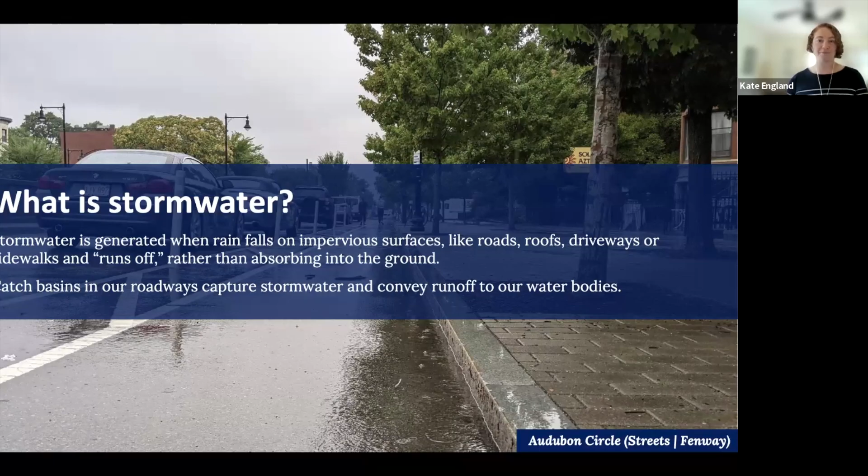Next slide, please. So in Massachusetts, and I think also largely worldwide, we have 2 major kind of issues with stormwater. The first is a water quality issue, and the second is a water quantity issue. So as stormwater moves across hard surfaces, it picks up a number of pollutants that are currently sitting on those surfaces, things like bacteria and nutrients, litter, and other things, and carries all of that with the water to our water bodies.

The second issue, the water quantity issue, is that the majority of our storm drain systems are designed to handle a certain amount of water that falls over a certain amount of time. So during a typical storm, less than an inch of rain falling over a longer period of time, our storm drain systems are able to capture and manage that water. But during larger storm events, which are becoming more frequent and more intense in Massachusetts, we are seeing an inch or 2 inches of rain fall in an hour. So the city of Boston storm drain system is designed to capture 5 inches of rain over the course of 24 hours. So when about an inch of rain or 2 inches of rain falls in an hour, our system just can't keep up. Next slide, please.

So thankfully, we have green infrastructure or nature-based solutions. And the way that we are defining those for city of Boston and for Massachusetts are features that use plants and soil and other natural materials to mimic our natural water cycle. They capture stormwater and allow it to absorb back into the ground the way that it would in a more natural, less developed environment. And while that water is absorbing into the ground, soil and plants are acting as filters to remove pollutants from that water.

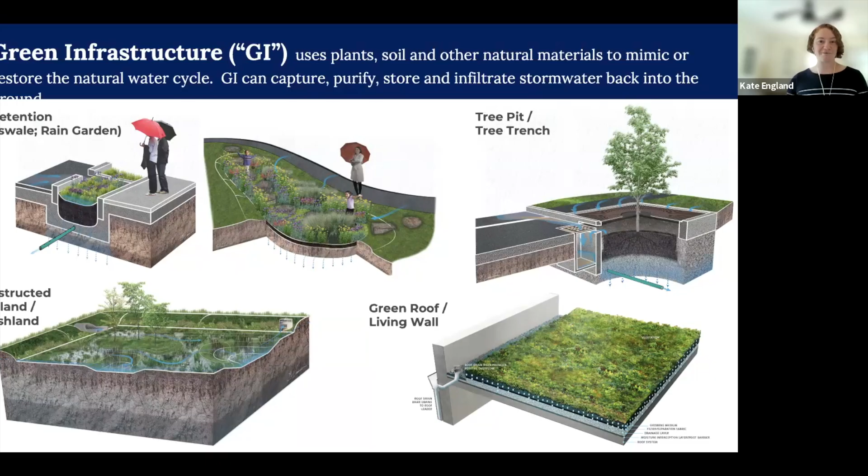So I've talked a little bit about the water quality and the flood storage benefits of green infrastructure, but there are also a number of what we call co-benefits, which include things like increasing biodiversity, helping to address environmental justice issues, providing opportunities for environmental education, and providing pollinator habitat in our cities. Next slide, please. So I have a couple things that I'm going to be talking about today, ways that the city of Boston and Massachusetts are encouraging the use of green infrastructure and the implementation of nature-based solutions. So I'm going to start with policies and regulations.

Next slide, please. So we'd like to think that people will use green infrastructure and nature-based solutions because they are the right thing to do with all these co-benefits, but often we find that we have to start with regulation. And so in that spirit, the city of Boston implemented what we call the Streets Green Infrastructure Policy.

And this policy requires that any project in the city that touches streets infrastructure has to implement green infrastructure to manage stormwater. So streets infrastructure could be the right-of-way, so the roads and sidewalks. It can also mean parking lots or maintenance yards, anything that is owned by the city's streets department.

We also have the Boston Water and Sewer Commission, which has site plan review requirements. And what this means is any project within the city of Boston that has to go to the Boston Water and Sewer Commission for a permit is required to infiltrate a volume of water that's equal to 1 inch of rain multiplied by the impervious surface on the site. Noting here that the term used is infiltrate, and that'll be relevant in just a minute.

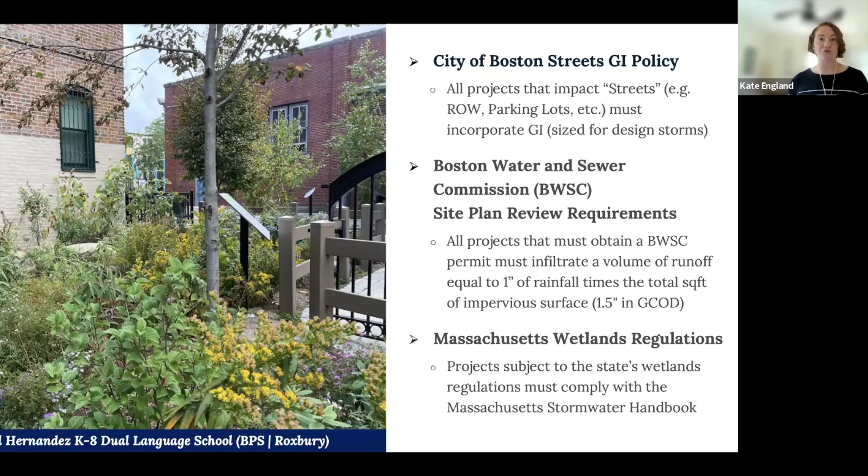Next slide. I'm going to talk a little bit about maintenance next. This is a question that comes up anytime I give a presentation about green infrastructure, and it's essential to making sure that your nature-based infrastructure is successful and healthy and thrives. Next slide, please. So the city of Boston has a number of contracts that are used to ensure that the green infrastructure in the city is maintained frequently and properly.

So the first contract that we have is a landscape maintenance contract, which focuses on maintaining the vegetation in our green infrastructure. The second is a porous paving maintenance contract, which is a different contractor, and that is responsible for maintaining all of our porous paved solutions. So porous asphalts, porous pavers, and other resin-bound stones. So surfaces that are not vegetated, but are still allowing water to pass through and absorb into the ground.

We are a public low bid system in Boston and in Massachusetts. I'm not sure how transferable this is in other countries, but in the United States, we have systems where you, as a municipality or a state, are often required to award your contract to the bidder who bids the lowest contract value, which sometimes results in contractors not being as qualified. Sometimes it results in lesser services provided because you're asking for the least expensive option.

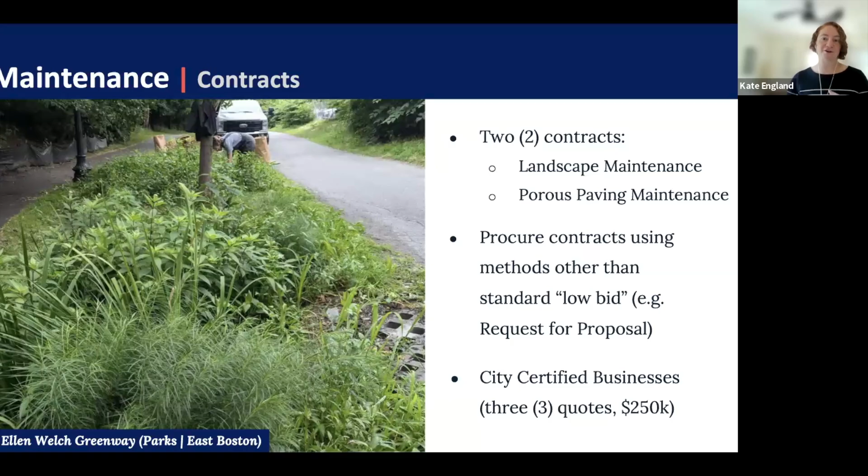Another thing that we're doing is we're using the city's certified businesses list, which are minority and women-owned businesses within the city of Boston, to award contracts for maintenance that can be up to $250,000. So what this means is contractors that are on this certified businesses list are able to submit proposals, and we are able to pick from 3 quotes and award to the contractor that we have selected based on their approach and their cost. Next slide, please.

We also have something that is called Thursdays with PowerCorps. So we have a PowerCorps program in the city of Boston, which I'll talk a little bit more about in a minute. But the program is a youth earn and learn program. So it is specifically for young people in the city of Boston who are interested in getting into green careers.

And so this program has been a wonderful addition to our city, and through the urban greening track, because there are several program tracks, we have young people who are helping us to perform maintenance on the city's green infrastructure features. So you can see some of the young people in the image here are part of our program. The participants are taught how to do general green infrastructure maintenance.

So, weed removal, litter removal, removing debris, and planting and things like that. They're also taught how to prune vegetation, as well as just basic fundamentals about climate change, about how green infrastructure works, and why we would like to be using green infrastructure to help reduce flooding in the city.

It's called the National Green Infrastructure Certification Program. It's a nationally recognized certification that shows that this individual is knowledgeable about green infrastructure maintenance. So the participants in the program go through this training, and then at the end of the program receive a license that they can put on a resume or use when they apply for jobs.

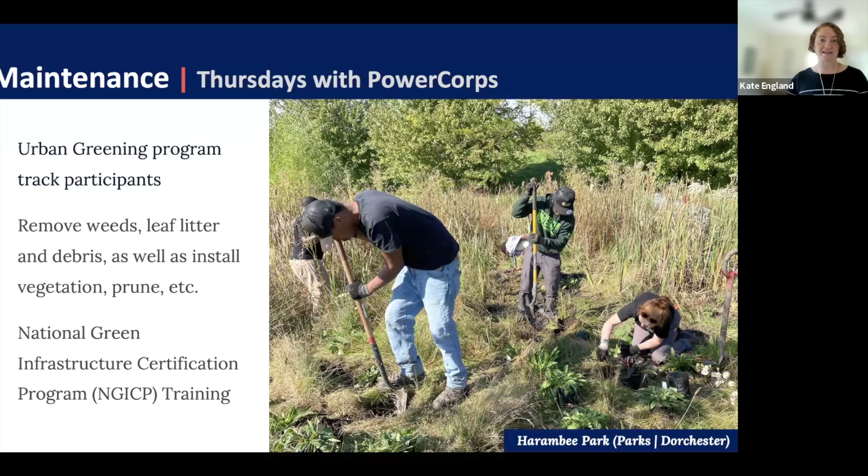Next slide, please. We also have the Green Infrastructure Volunteer Program, which is a really wonderful community-based program that enables our residents and folks who live and work and play within Boston to help be part of our green infrastructure maintenance. The program allows people to adopt a green infrastructure feature in their neighborhood, and then, after going through training and receiving protective equipment from the city, they're able to go out and do green infrastructure maintenance on their own time.

We found that a lot of people wanted to be part of maintaining green infrastructure in the city, but were unavailable at the times that we were holding volunteer events. And so this program, which took a lot of negotiation with the city's legal team to get a waiver that everyone was comfortable with, allows people to go out and maintain green infrastructure when they're available, instead of having to make time when we're hosting events. Next slide, please.

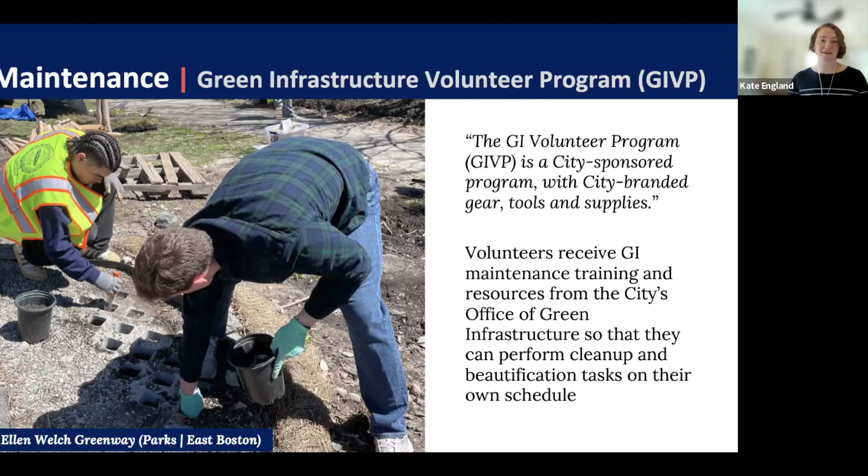The form had a number of photos of plants that do well in green infrastructure features. And the students were able to vote using the form which plants they thought were the prettiest or the most interesting that they wanted to see in this rain garden. So based on the results from the form that the students filled out as part of their classroom activities, we purchased plant material, brought it to the school and installed this rain garden with the students and their families and staff at the school.

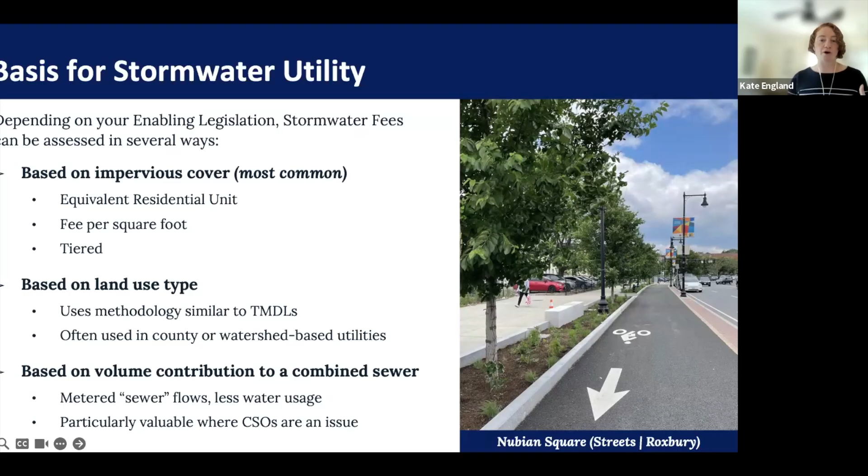They can also be based on land use type. This is very similar to how we do water quality work in the United States. So if you have an industrial or a commercial property, your fee is higher, whereas if you have a residential property, your fee is lower. And then another is it can be based on volume contributions. So if you have a combined sewer system where your sewer and stormwater are managed by the same set of pipes, the more stormwater you are contributing to the combined system, the higher your fee is. Next slide, please.

So what are your goals? What you're trying to accomplish with the stormwater fee should dictate how you set it up. So if your goal is to generate as much revenue as you can so that the municipality or the state or the county can manage stormwater, then you're going to want a higher rate and really clear information about what happens if you don't pay. What are the fines and fees if you don't pay your bill? If your goal is to get more assistance from the public, you want to engage people in this work, you want to have a really strong credit program, something that's easy to navigate so that people understand how to apply for credits to reduce their fees.

You're also going to want a rate that's high enough so that people are encouraged to apply for credits. So if your rate is really low, most people will say, I'll just pay the fee and then I won't have to worry about maintaining green infrastructure on my property.

And if your goal is to really change behavior across your municipality, like get people involved, really have people thinking about climate resilience and stormwater, you're going to want a really generous grant program and a credit program to get people excited about helping to manage stormwater, building green infrastructure, maintaining green infrastructure. And you're also going to want a lot of resources and support so that people can apply for the grants and apply for the applications.

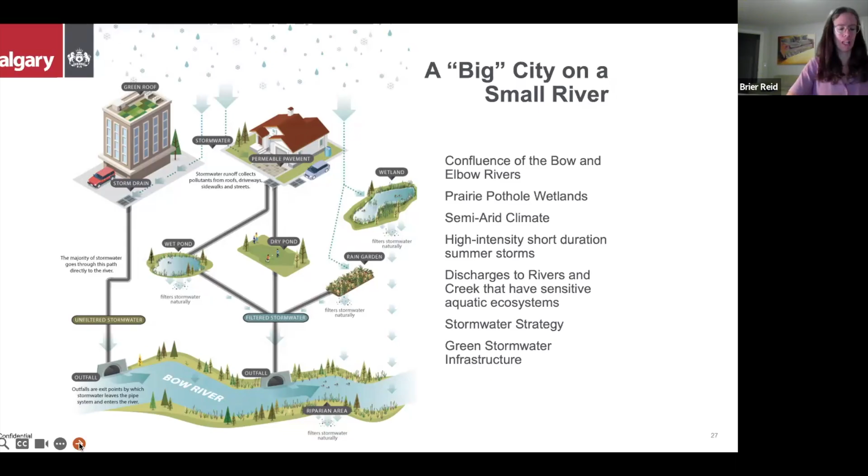So let me tell you a little bit more about our climate in the next slide. Our climate and our existing pre-development conditions have really driven our inspiration for nature-based solutions in Calgary and also informed our approach to stormwater management directly. Calgary has a semi-arid climate, as I mentioned, characterized by relatively low annual precipitation and high evapotranspiration. So on average, the city receives approximately 410 millimeters of precipitation per year, which includes both rain and snow, and snowfall probably makes up a significant portion of this.

Despite occasional heavy rainstorms, Calgary's dry and sunny days contribute to high rates of evaporation and transpiration. As a result, pre-development runoff is extremely small, with over 90% of precipitation returning to the atmosphere. The climate features cold, dry winters and very warm summers, often punctuated by sporadic, intense thunderstorms. These climatic extremes pose challenges for stormwater management and green stormwater infrastructure, as infrastructure must accommodate both snowmelt and sudden downpours.

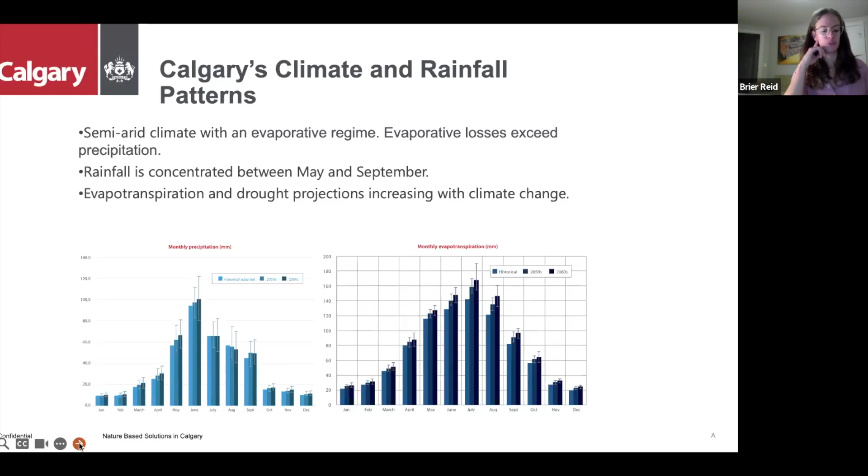So as you can imagine, an urban environment with high impervious surfaces is not predisposed to facilitating such a high rate of evaporation. So looking at the graphs on the screen here, you can see that monthly evapotranspiration potential often exceeds precipitation. They also illustrate the projected changes to monthly precipitation and evapotranspiration, highlighting the importance of an adaptive water management strategy to future climate conditions. Let's go to the next slide here.

Yes, so historically, wetlands in and around Calgary have played a vital role in natural flood control and stormwater management. Before widespread urban development, the region was home to thousands of prairie wetlands that are largely shallow depressions that would fill with water, sometimes permanent, sometimes temporary. During rain events, they would slowly release it over time. These wetlands acted like natural sponges, absorbing excess runoff, slowing the movement of water across the landscape, and reducing the intensity of downstream flooding. In doing so, they helped protect riverbanks, recharge shallow and deep groundwater, and maintain the ecological balance of the Bow and Elbow River systems.

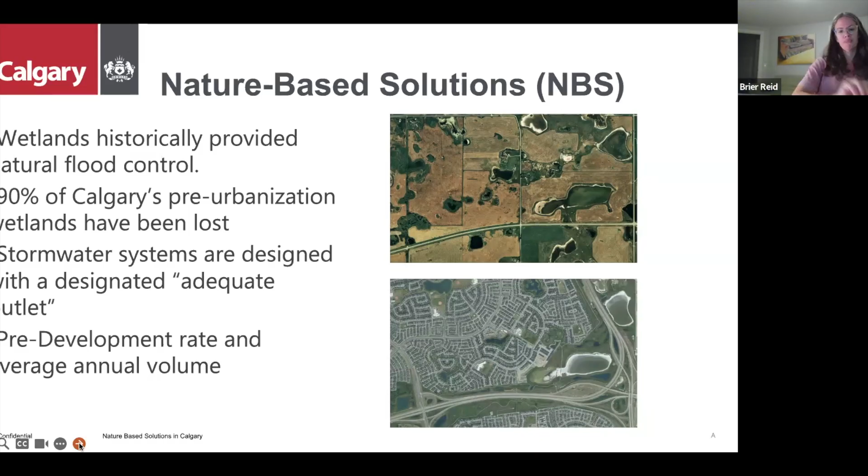So to compensate for Calgary's low natural runoff, constructed stormwater management systems, in addition to the preserved wetlands that I mentioned earlier, are designed to mimic pre-development release rates. Release rates typically range from 0.8 to 2.5 liters per second per hectare, with average annual volume releases restricted to, on average, approximately 40 millimeters. So we're aiming for roughly 10% of the city's average annual precipitation released to the natural systems. So our constructed stormwater systems rely on nature-based infrastructure, including naturalized wet ponds, constructed wetlands, and low-impact development or green stormwater infrastructure strategies such as bioretention and resilient landscaping.

Due to the relatively low release rate that I just mentioned, most of these wetland or naturalized wet pond facilities are very large, occupying about 4% of their catchment area, or approximately 2.5 to 3 hectares in size. You'll see a photo on the right-hand side. So very large facilities throughout the City of Calgary. Beyond managing water, these solutions offer multiple co-benefits. They can help with biodiversity enhancement, meeting wetland policy objectives, and contributing to urban livability by providing public amenities and supporting city building goals. Many of these features provide a prominent place in communities and neighborhoods within the City of Calgary.

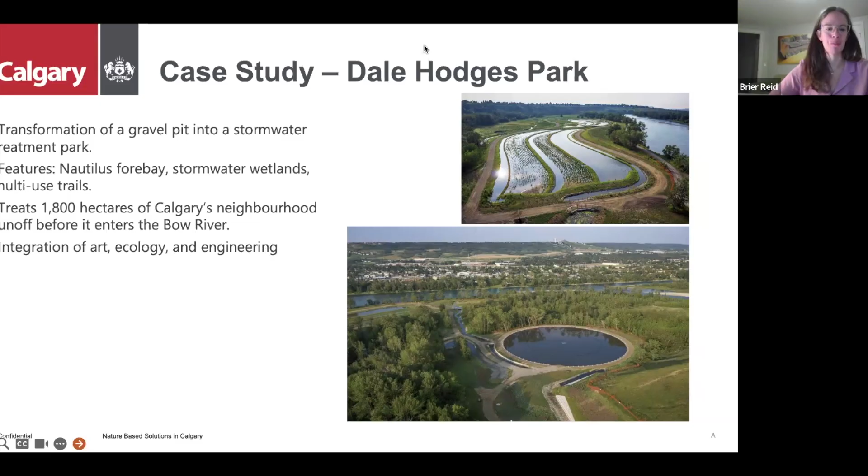The system includes features such as a settling pond, polishing marshes, and wet meadows, and is estimated to reduce sediment loads in the Bow River by approximately 50%. This is but one case study that I am happy to discuss further during the comment section of this webinar. But I thank you for the opportunity to share some of the ideas that we've implemented in the city of Calgary based on nature-based solutions.

Thank you. I'm unmuted. So thank you very much, Reid, for this presentation. You can see how the geography of Calgary influences your challenges and what you're facing. It's a nice, I don't want to say contrast to Boston, but certainly a different mix of circumstances and climate challenges.

Our last presentation is from Finland and the city of Tampere. Unfortunately, our speaker, Anna Vehula, who leads the multi-country City Blues project, was taken ill suddenly and is not able to join us today. But fortunately, she prepared an excellent presentation on the City Blues project, and I'm pleased to share this presentation with you, with support on the chat from her colleague, Joanna Val, who's online and traveling today, so she also couldn't be on the video screen.

So let's look at the City Blues project and what they've been accomplishing. This is a very interesting project, and I'm very happy that we're going to look at what they're focused on, because it brings together pilots from 5 Nordic countries. So let's have a look. Next slide, please. The project was looking at, first of all, preventing flooding and negative effects from climate change. And they brought together 5 cities from different countries to test out various solutions. And those experiences and the results from the projects will lead to development of a web-based tool for cities.

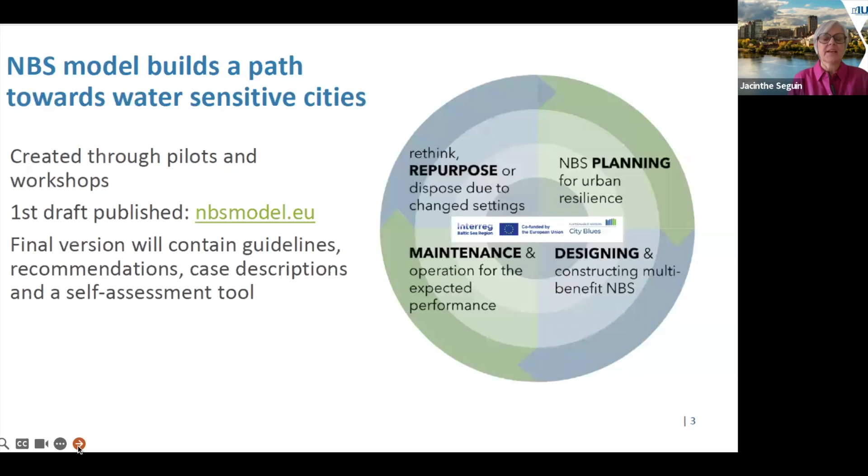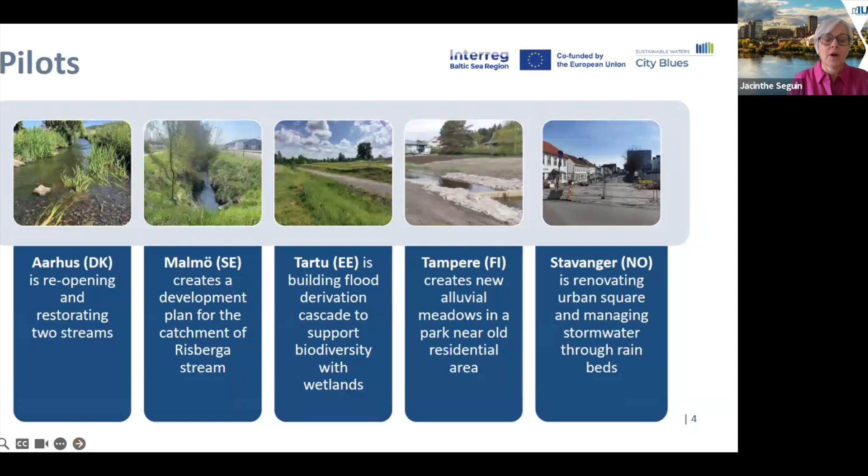So I mentioned that this project brings together 5 cities from 5 Nordic countries: Denmark, Sweden, Estonia, Finland, and Norway, each testing different NBS solutions for different particular challenges, and altogether it's leading to an interesting set of lessons learned and guidelines. Next slide, please. Anna and Joanna wanted to focus on the specific experience in Finland, in the city of Tampere, and we'll look at what they have done there and what the results were.

So I want to bring your attention to some specific features that are quite interesting for this project. One is they did use extensive modeling during the planning phase to guide the design of the site. They also focused on selection of local species in collaboration with a Finnish organization called Wild Zone. A lot of implication of citizens through voluntary events, and you'll see some of those activities in a minute. And then also the use of foreign trees, part of the city's tree species experiment.

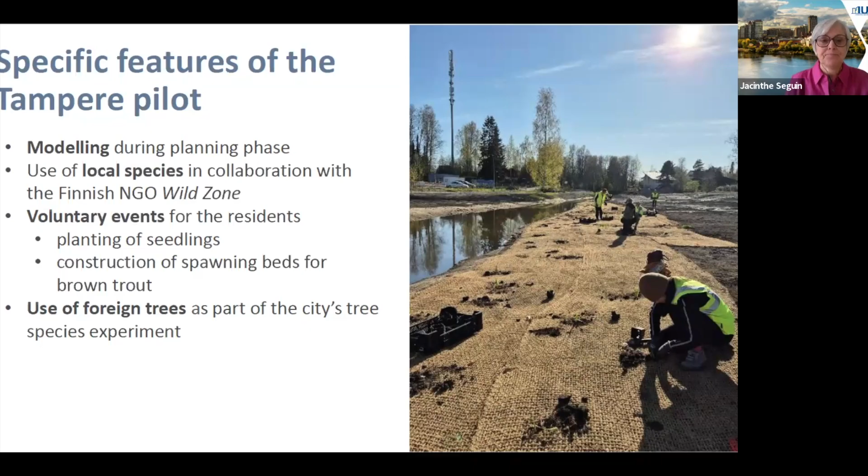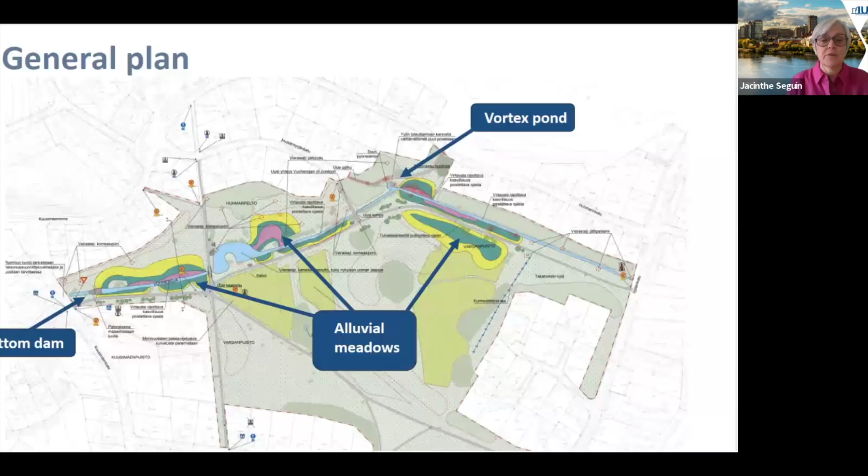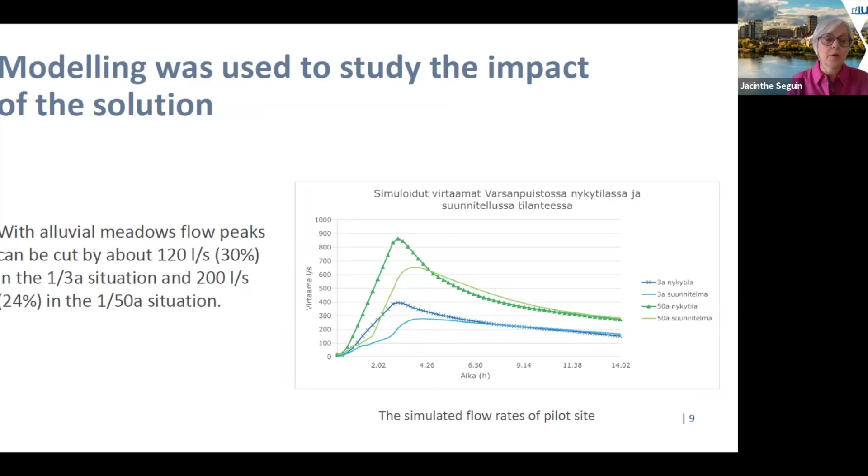Next slide. So you have a look at the site, which is still quite large, that has several various features: a vortex pond, a few alluvial meadows, and then a bottom dam. So that was all part of the Tampere pilot project. Next slide. And I mentioned earlier that they did model the water flows and the peaks, to make sure that the design of the natural solutions would actually address the issue of the site.

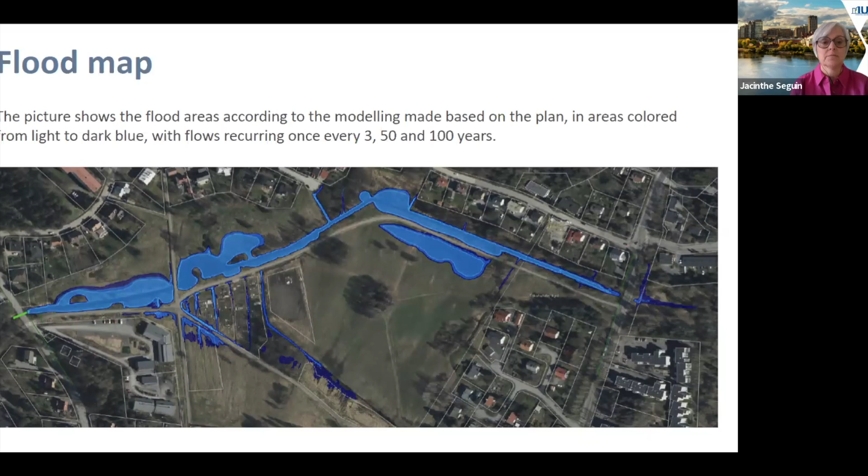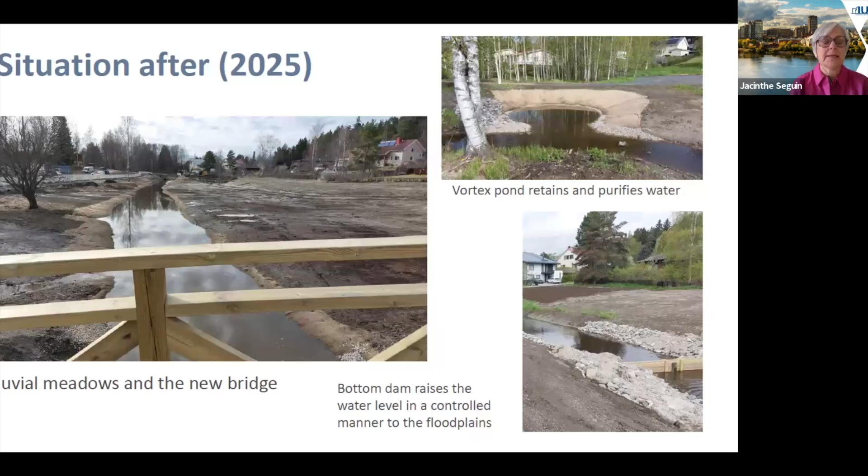Next slide. So after 2025, you see some of the construction of the alluvial meadows, the pond, and also the bottom dam that raises the water level in a controlled manner to the floodplain. Next slide. And then this summer, this is what the site was starting to look like, and you'll see that the vegetation will regenerate. And next slide. And then Joanna and Anna provided some insights on their lessons learned, which I think are very important from this. So next slide.

So a little information on alluvial meadows. Next slide. So lessons learned. For them, stakeholder involvement was very important. You needed to get buy-in from the communities. Workshop was implemented, and some marketing, and then construction of the sites needed to be accepted also by the citizens. Next slide. And then a lot of planning went into the pilot, even though it was a pilot. And they noted that the more diverse the group of experts involved in the work, the better the end result. High quality data was very important.

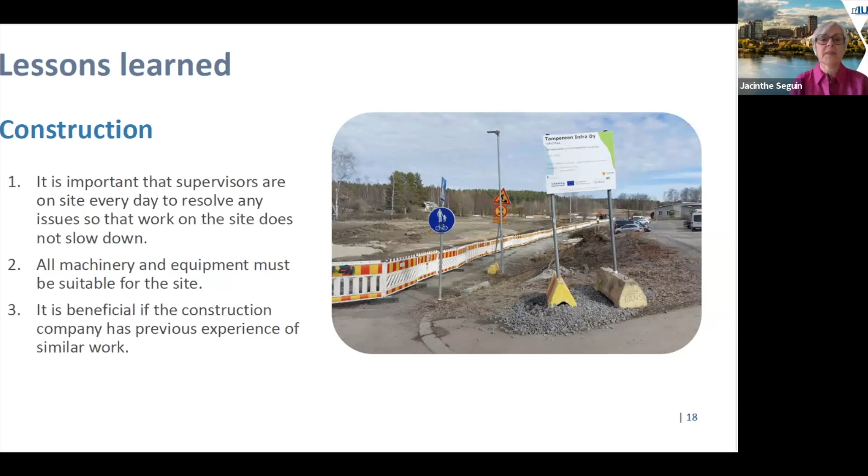And the last lesson learned is construction. A lot of oversight was needed, and also key was the experience of the company doing some of the work, as well as machinery and equipment. Next slide. So you can see as well some of the site today.